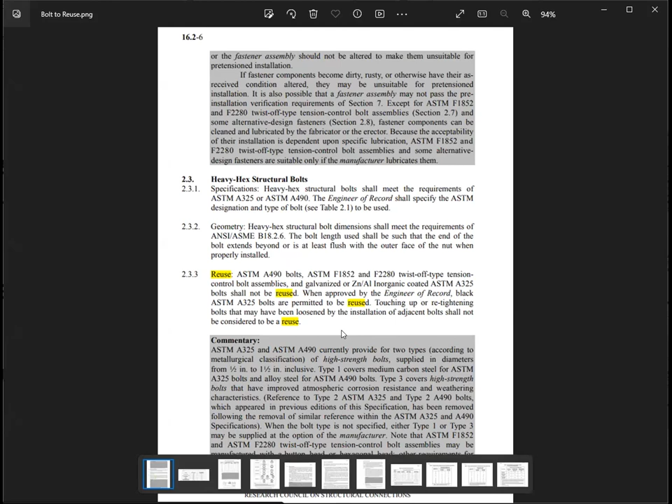This is just a reference from the American Steel Manual. So this is regarding a bolt that you could reuse after installation or after tightening it. Because before, some of the guys would just tighten and loosen the bolts, and some don't know that they cannot reuse it, or they can use it as long as it's approved by the engineer of record, as it was stated right here.

So galvanized and twist-off bolts like a TC bolt, and zinc, aluminum, inorganic coated ASTM A325, you cannot reuse. When approved by the engineer of record or the designer, plain black ASTM A325 bolts are permitted to be reused as per this reference book.

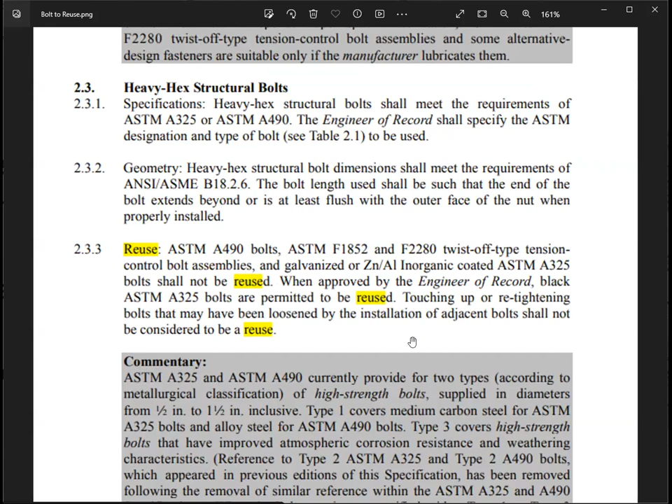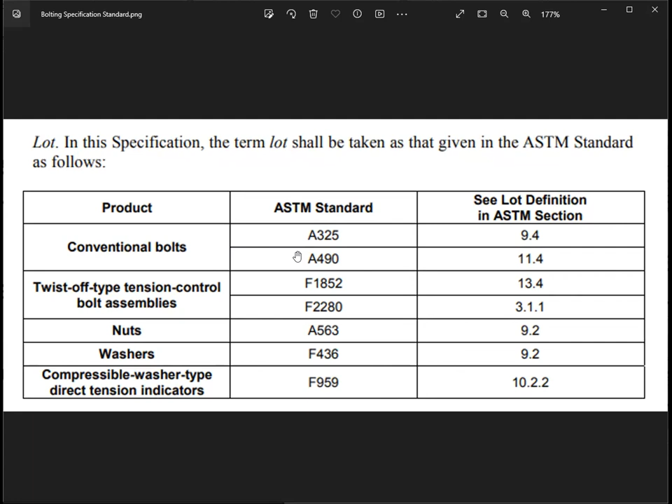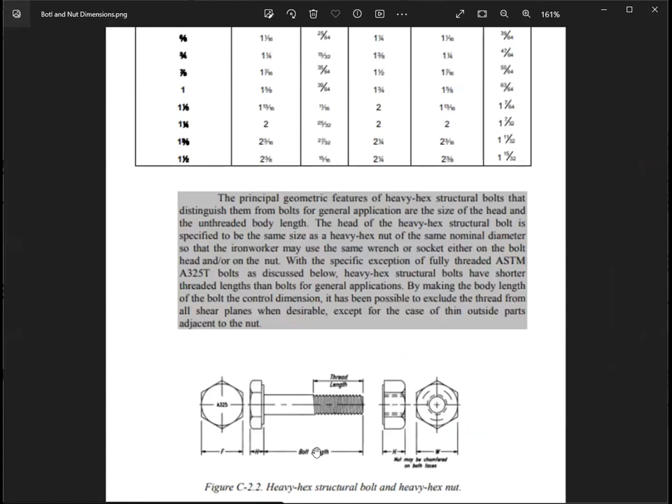These are the ASTM standards for high strength bolts. So if the bolts that you're gonna inspect on the job are not listed or not marked with this standard, it's not considered a high strength bolt. This is the bolt sizes reference. The bolt length measurement is from the bottom of the head to the very tip, and the head should be labeled, engraved with the ASTM standard.

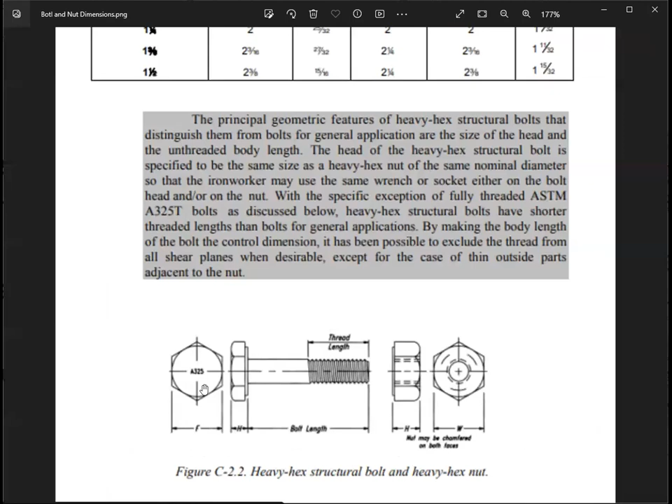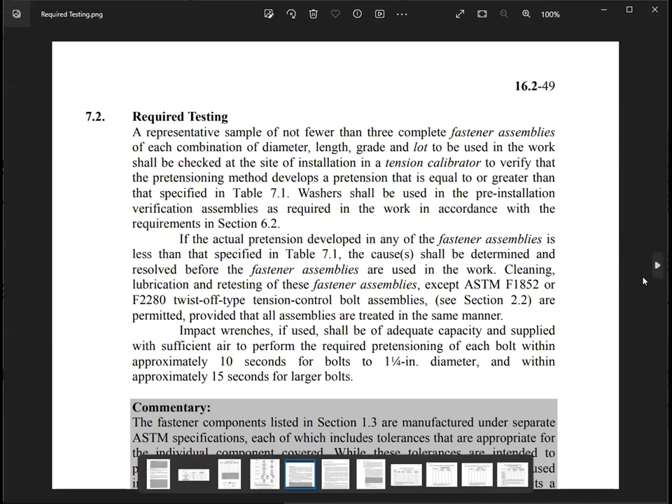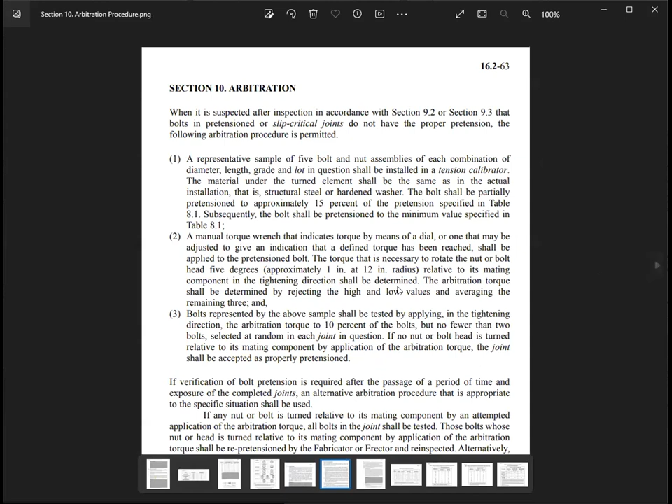Here's the sample of the markings and the required test. So this was the reference. Arbitration test. We could discuss this in the next video. This is a lot to discuss here. So you could read and see if you could figure out how to do the arbitration.

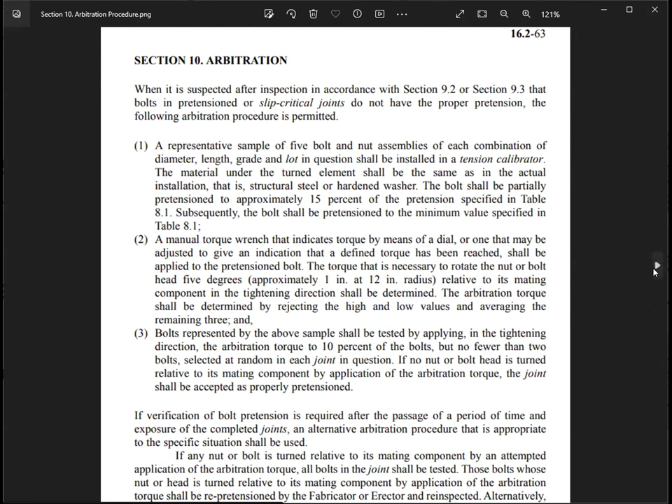The arbitration is only used when there's some non-conformance that you have encountered on the job, if you don't have the torque value to tighten the bolts, something like that. So it should also be one of the necessary procedures that you could use just to go on with the inspection. The inspection is section 9.

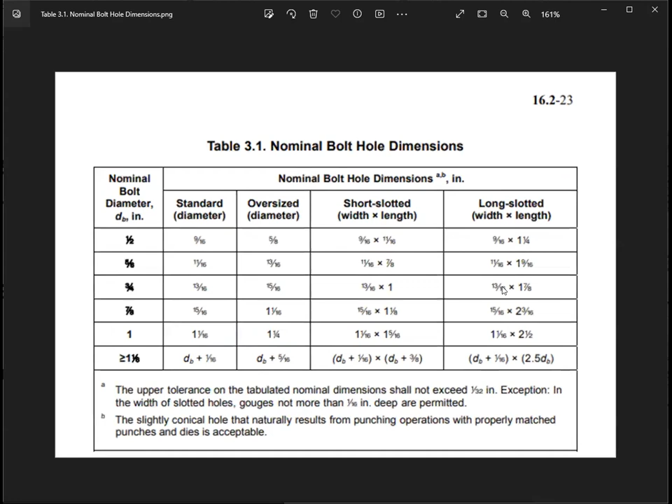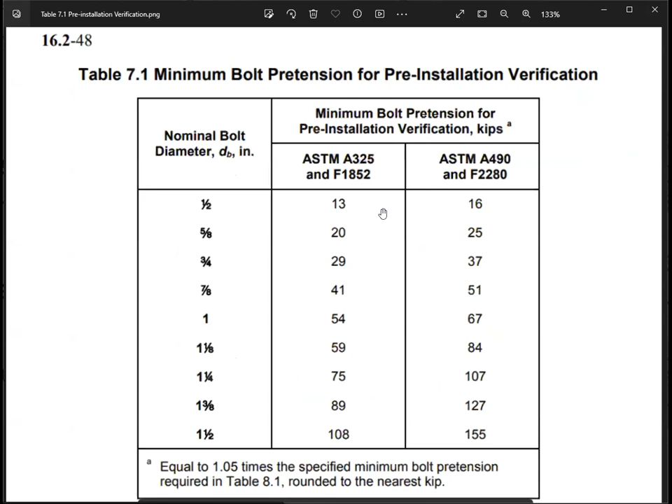These are the holes, standard holes that you could put the bolts in between structures. It's another reference. And this is the pre-installation testing for Skidmore tests. This is the reference, table 7.1, the pre-installation verification. This is the type of bolts. This is the size, diameter of each bolt for each type. You got the kips value, so it's thousands of pounds for the kips.

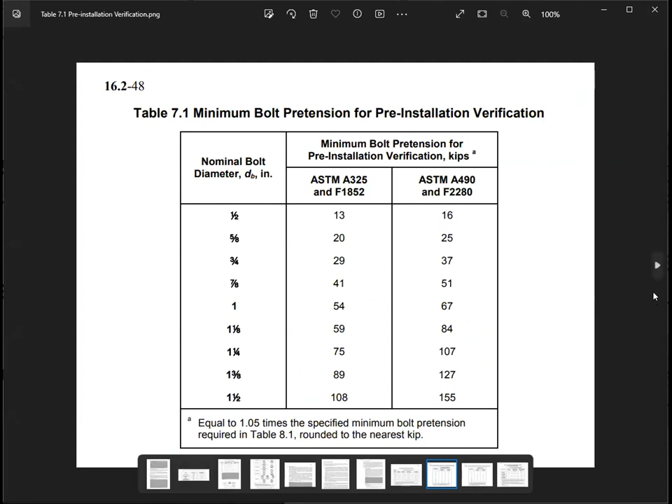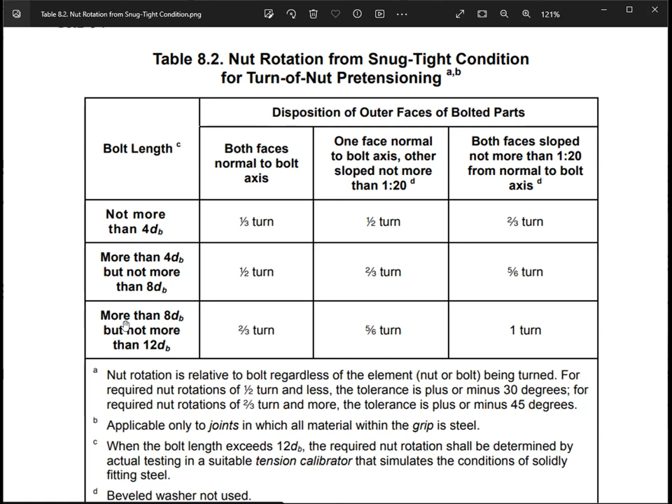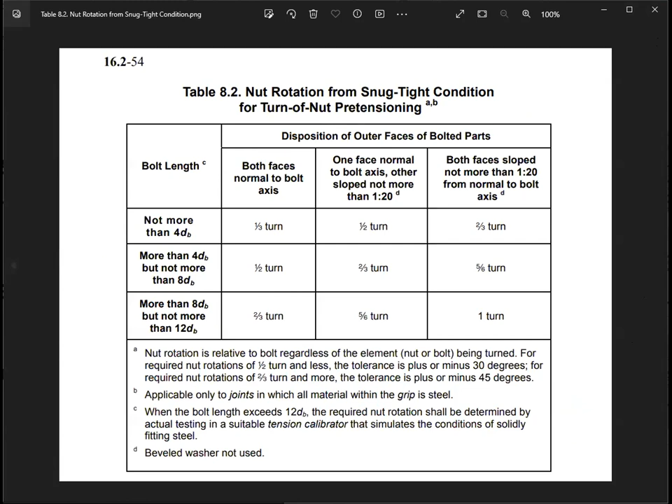Okay, so far that's the recap for this kind of inspection. And then let me show you some.

So when you go to the job site, the first thing to ask for is the drawing reference, for you to know what kind of bolt it is. The bolt type and specs or size, you can see that from the general notes of the structural drawing, or in the details. And some documentation like the mill test report for the bolts, you need to ask for that to review and to compare the lot number.

So let me show you some photos from the job.

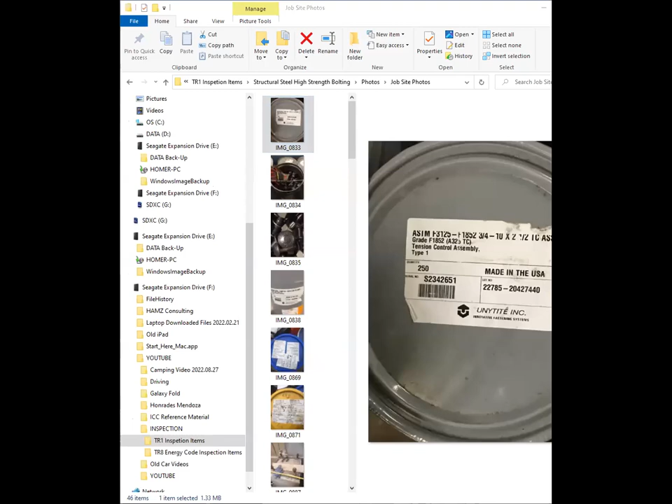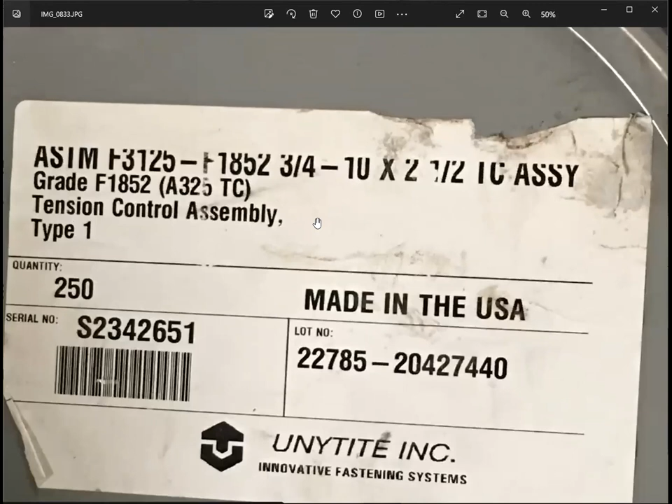So these are the photos. This is the size, the type, the specs of the bolt: 3/4 inch diameter by 2.5 TC assembly. So this is the lot number. You need to take note of this.

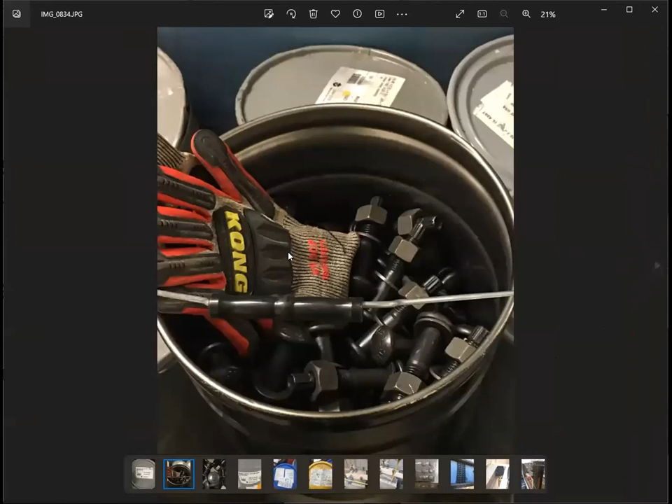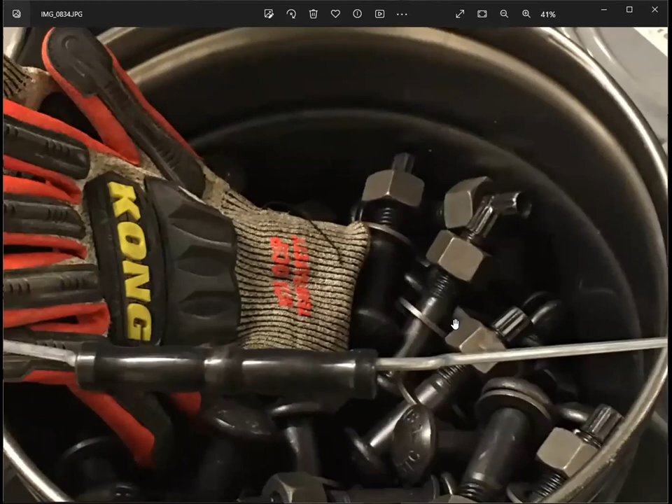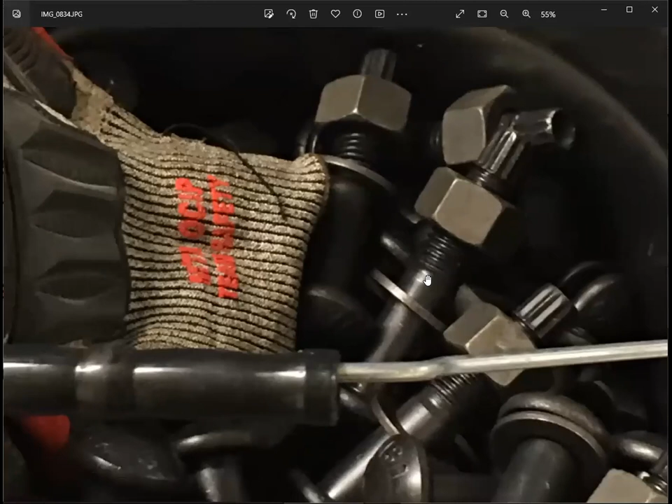And when you encounter the bolts in the can and the container, at least you need to verify that everything is lubricated, shiny, and make sure that they're using a clean bolt, so that when you turn the nut, it will continuously roll up to the last thread, the last teeth of the bolt. These are the markings, A325, these bolts, and other stickers. So these are the stickers that I took.

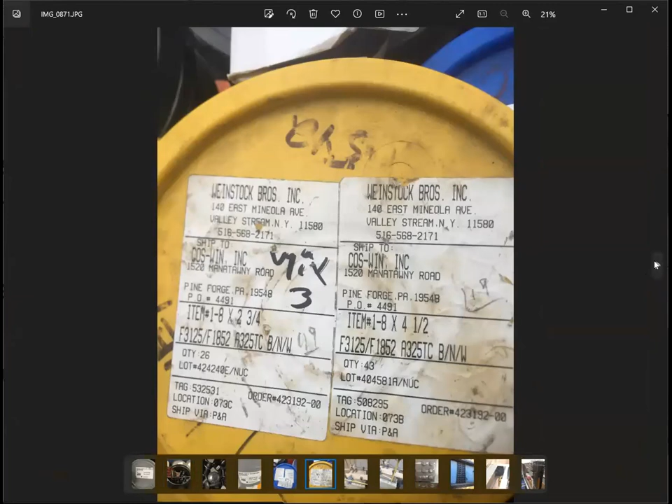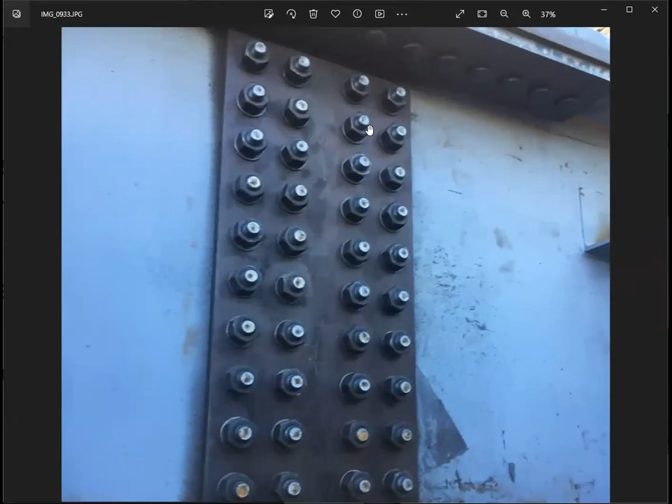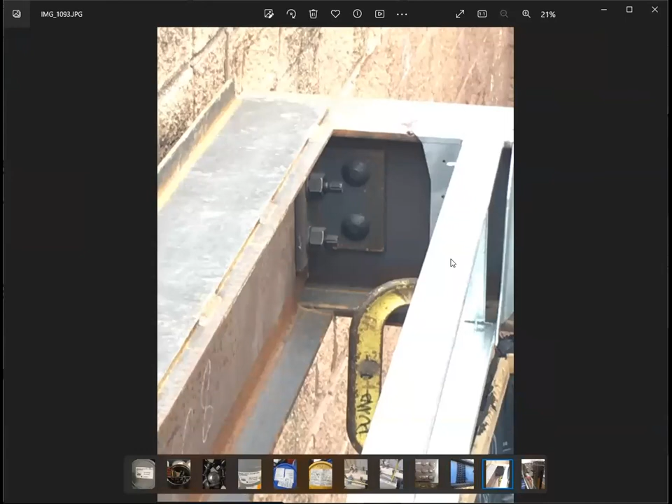Here's the bolts. This is the TC bolts with the twist-off, sheared tip. It means it was tightened already. This kind of installation, you need to note this because it is very difficult to tighten it with this torque gun or impact wrench, impact gun. So you need to note this from the drawing or note this in your report, where there's no way for this to be tightened unless they're gonna use a hexagonal bolt to turn it with the wrench or an open wrench.

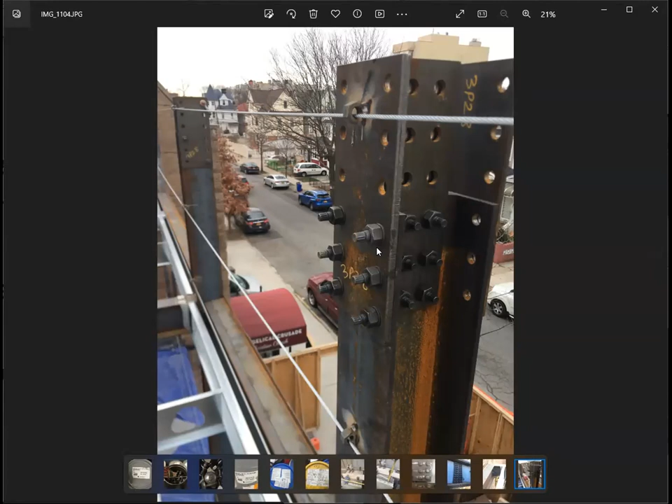This is bolts when they use it as erection bolt. So erection bolt is when they're only setting up all the steel members to fit the bolts; they're not gonna tighten it, or they're just gonna snug it a little bit. So be noted and keep an eye on it, because if they tighten it, they cannot reuse it unless it was approved or unless it was a black bolt. And this is a TC bolt where if they tighten it, they're gonna twist off the tip and it cannot be reused again.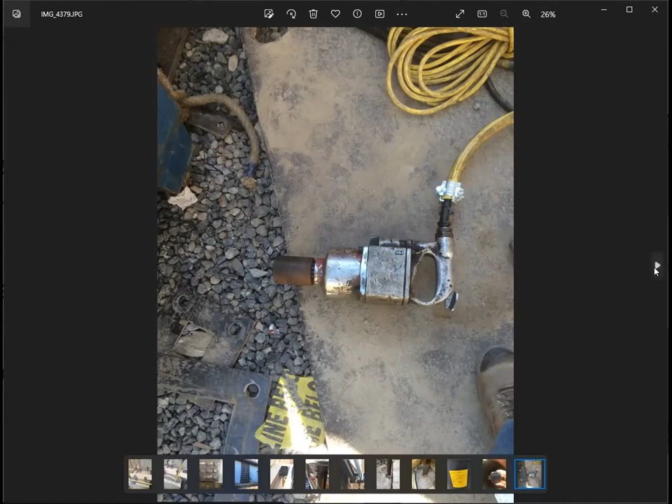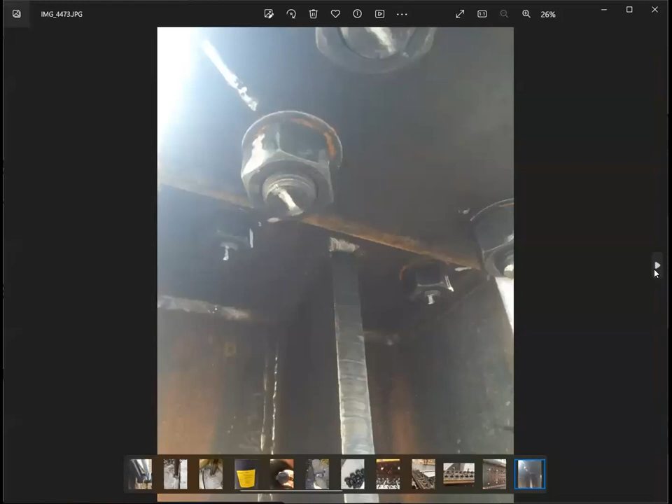This is the turn of the nut method. So I mark the bolt and the nut. After they snugged it, I have to mark it and turn it like 2/3, 1/3, whatever it is on the table. Turn of the nut, yes. Just remember each size of the bolts, 4 times the diameter, for the length is gonna be the equivalent length for each bolt. So there's an equivalent turn after snug tight condition.

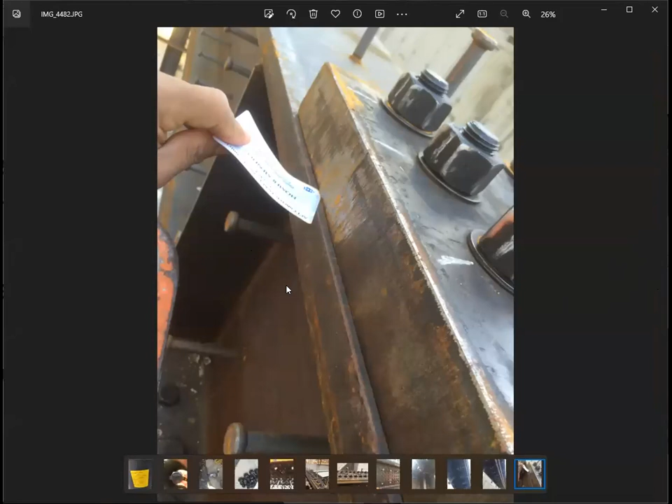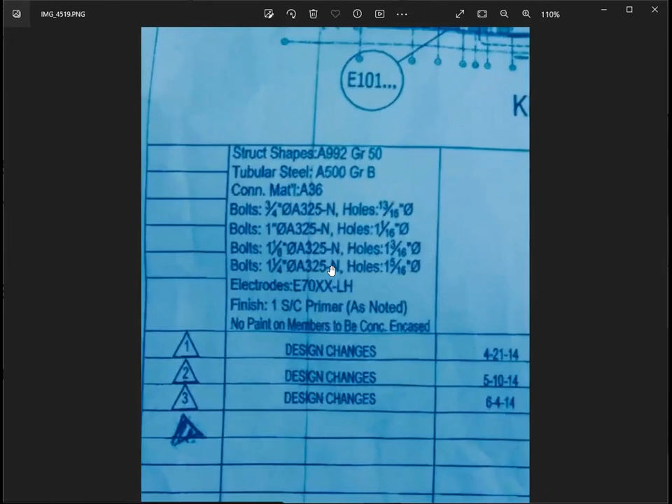This is when I'm testing the faying surface. So you can see how thin is my feeler gauge. It means it's in solid contact between steel to steel. And this is one of the drawings that you could see in the job. Just the size of the bolt diameters, the specs, and the length. And this is for the holes.

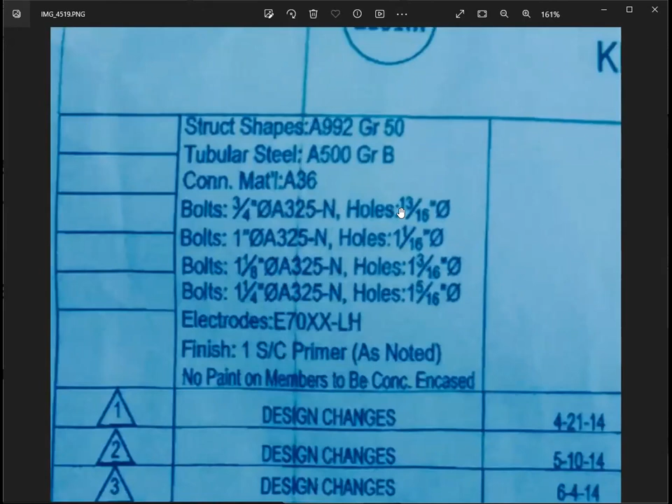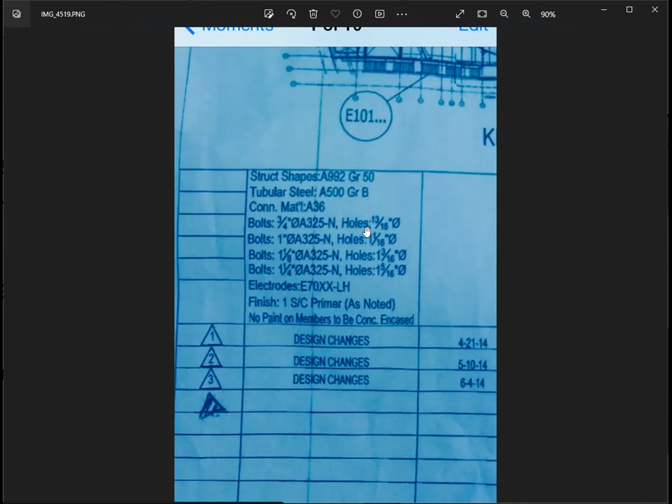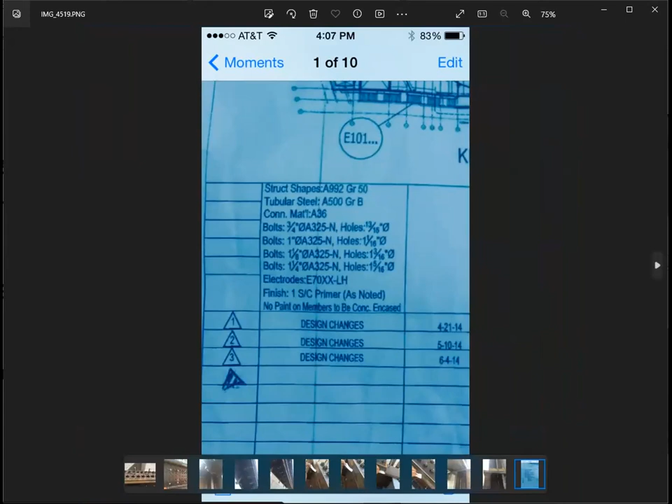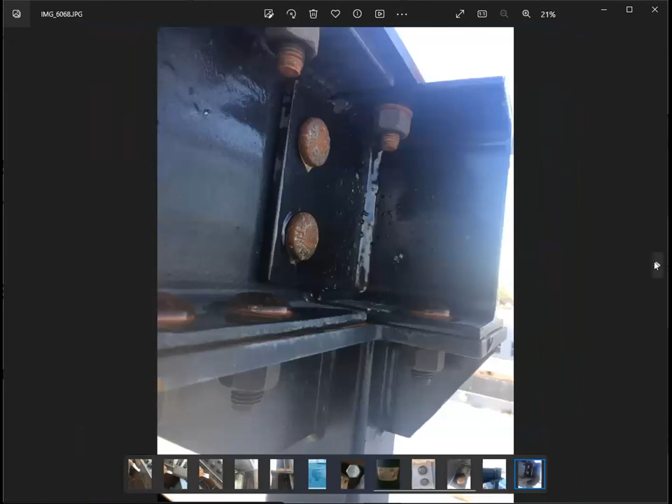And then these are my markings, like the non-conformance or the work in progress that I need to come back for, and the marking drawings. All right, so that's it for today.